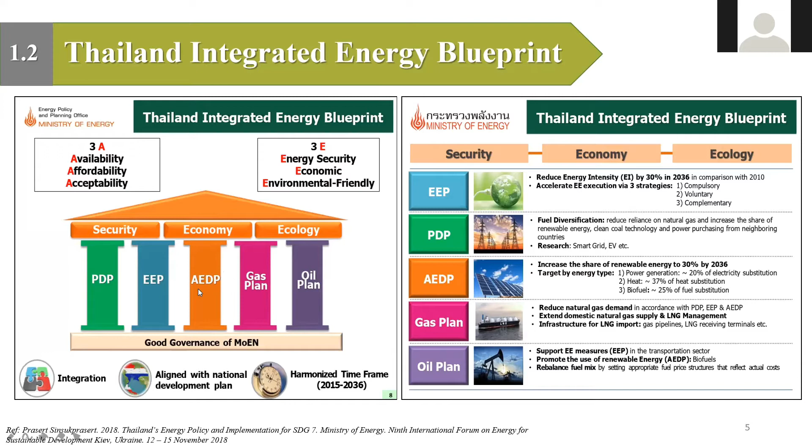Since 2015, Thailand has developed our own energy plan, which is called the Thailand Integrated Energy Blueprint. This blueprint describes 5 fields of energy. But I want us to focus on the AEDP, the Alternative Energy Development Plan. This plan, AEDP, describes the target of how much energy consumption and what alternative energy ratios we want to accomplish in year 2015, 2021, and 2036.

Maybe it's because we lack the amount of feedstock, biomass, biogas, or maybe because we lack power plants, the maximum capacity of power plants is still less than the target we aim. Or maybe it's not those 2 problems, but it's because of poor supply chain management, or because of bottlenecks occurring in the supply chain. So with this problem, I would like to study the bioenergy supply chain of Thailand and investigate the problem.

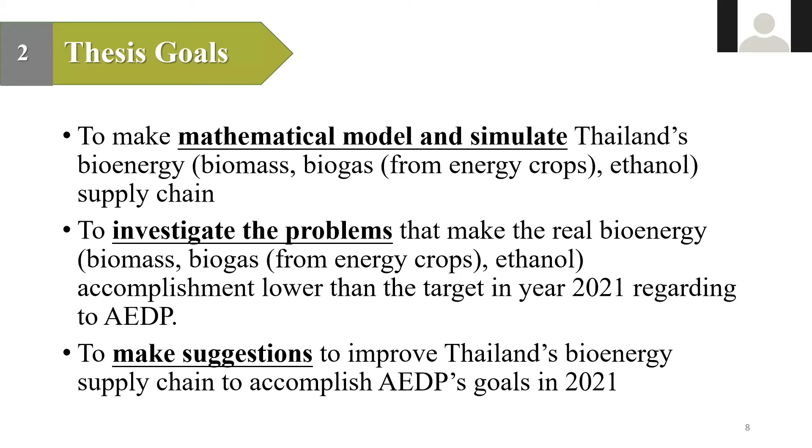So my thesis goals are: the first one is to make a mathematical model and simulate the Thailand bioenergy supply chain, focusing on biomass, biogas from energy crops, and ethanol. The second one is to investigate the problems that make the real bioenergy consumption ratios lower than the target in year 2021. And my third goal is to make suggestions to improve the Thailand bioenergy supply chain according to the plan in 2021. But before we start making a model and simulation, firstly we have to know about the supply chain profile.

Feedstock such as biomass can be used as a fuel to produce electricity directly, or it may be passed to some process to produce biogas first, and then this biogas is used to produce electricity. As far as I know, in Thailand we have 3 different technologies for biomass power plants: cogeneration, direct firing, and gasification. For biogas power plants, we have either steam turbine or gas turbine. These different technologies mean different energy coefficients, which we have to consider for the energy conversion. But I will talk about it later.

For feedstock such as crops, usually the crops pass to crop-based products manufacturing to produce some product first, and then from this product we get biomass and waste as byproducts, and we use this biomass and waste to produce electricity and ethanol afterward. The electricity is delivered to our distributors, which are PEA and MEA. These two are government companies.

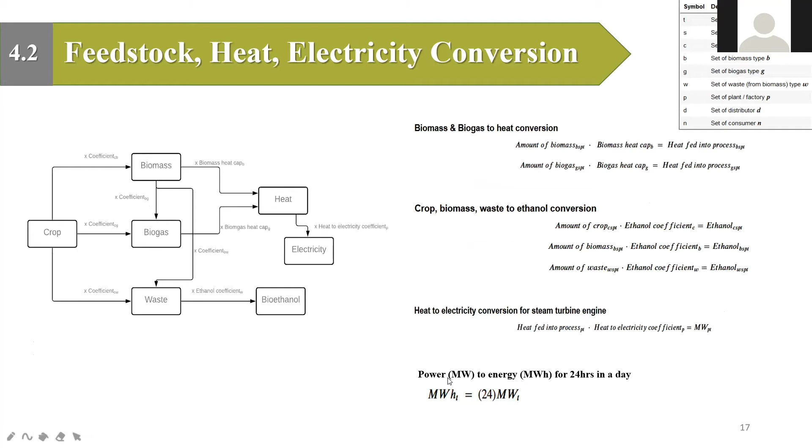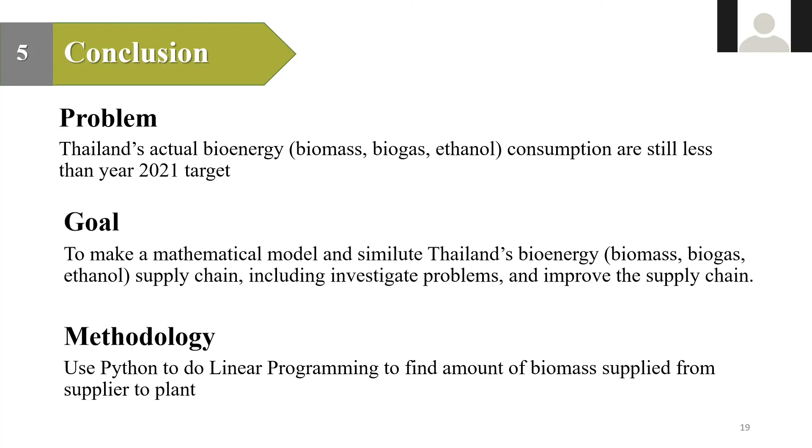My methodology is using Python to do linear programming to find the amount of biomass that deliver from supplier to plants at each time step. And this is all my presentation, and thank you for your attention.

Thank you, Paul. Thank you. Thank you. Thank you. Who would like to start with questions? Yeah, Henny, you can just start.

A couple of questions quickly. So first thing is, would you consider your master thesis to be part of some, let's say, white paper for your government? Could you sort of promote this work that you're doing to the authorities in your country, and assuming that you get interesting results and so on and so forth, turn this into something useful for the authorities and not being just something that gets you a grade and that's it?

Yes, thank you for this question. I actually want to present this to Thai government. I write an email quite a long time ago to Ministry of Energy, but they haven't replied to me yet. But I want to present it to Thailand as well.

Okay, because the point is maybe you could attend at some point, I don't know when, some conference related to this topic and meet with, let's say, high-level people there, or why not advertise this on, let's say, Twitter or LinkedIn, etc. Because if you manage to get something useful, then it is very, very good, because this is an important problem in your country. And if you could contribute at least part of the solution, that would be very nice for everybody.

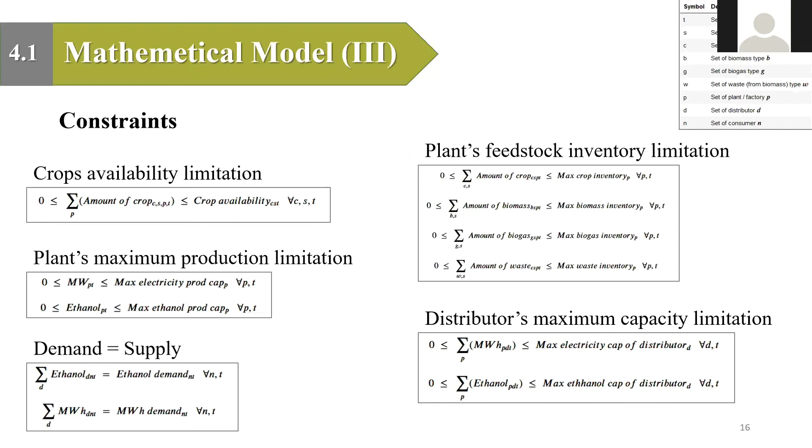Now, just a quick question again. If you go back to your slide with equations. Equation? Yes, you showed some equations, yes. So all these, basically, did you write them on your own, or did you adapt them from?

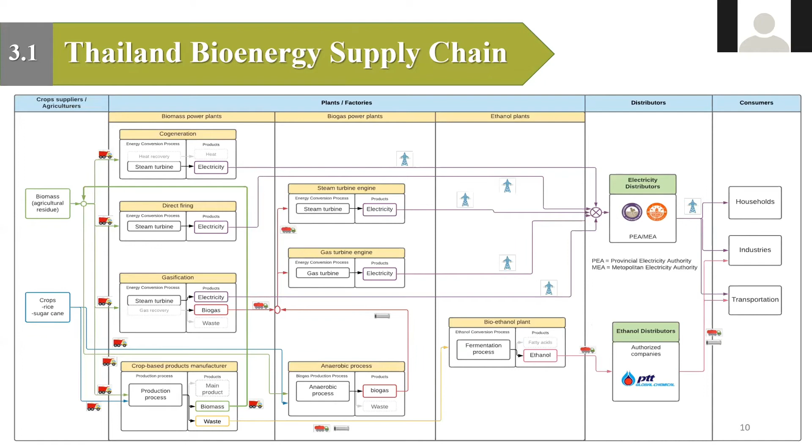First, I write on my own by understanding the supply chain. So I have to know what is input, what is output, and then adapting this supply chain, which I also make on my own for my understanding. To write this equation, I write my own.

Mm-hmm. Okay, so because for me the idea is that you really show that this is exactly your work and your ideas and so on and so forth. I didn't get that you did that on your own, and okay. So thank you. That's all for me. Thank you.

Peter, would you like to ask anything? Yeah, just a quick question. So it looks like you're doing some optimization. Yes. And this is like linear optimization, and this is a pretty standard model in this supply chain research. Yeah? Well, there is this field of study which is called supply chain. Like this linear programming is like the first thing to do.

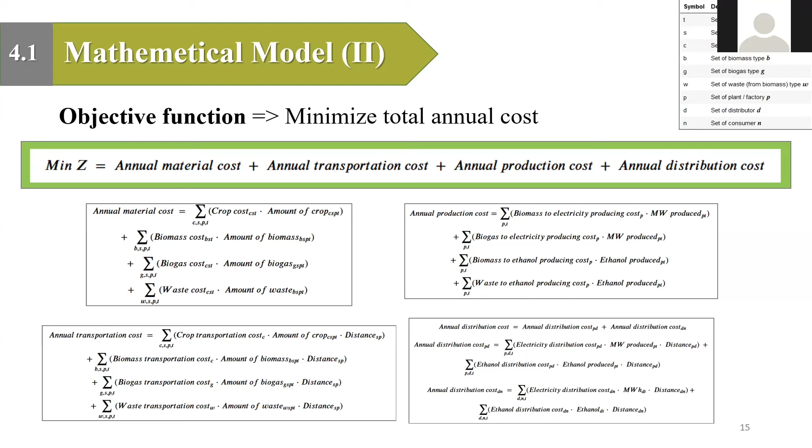So, but what are the methods that your government uses at present? Like typically, this kind of algorithms are implemented inside of those ministries or whatever plans at the planning stage. Okay, you mean what the Thailand government does to plan this goal, right? Yes, yes. So how is it realized now?

In the report, in the journal report of this plan, they haven't stated their methodology. It's like they collect the historical trend, and then they said what their goal is in the future. So I also don't know how they derive it, what their method is. So this is one of my points to develop my mathematical models in this thesis.

But do you have data to actually compare your results with what happens now? So for example, you have available data on the production of power, I guess. And then if you, for example, have the available data on the primary energy sources that you are using, then you can clearly show that the method that you develop, like a software that you develop, can allow to produce more, for example, out of the same set of primary energy resources.

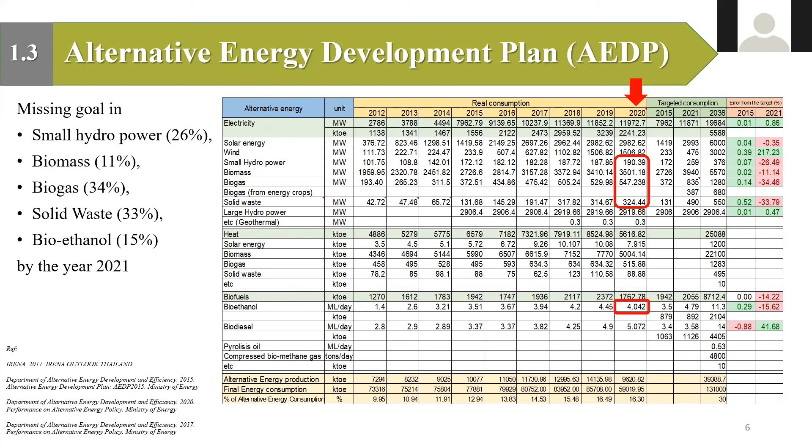So you need to compare it with something, that would be really good, because otherwise you say, okay, I wrote a method, but maybe they're already using something like that. See what I mean? You mean that I have to model something and compare? For example, if I use data in 2020, my result should be compared to the real result in 2020, right? Yes. So with the results that they already have, if you have the input data. So you definitely have the data on energy production, but you probably don't have the data on the amount of primary resources that were consumed. I have, I mean, resource, right?

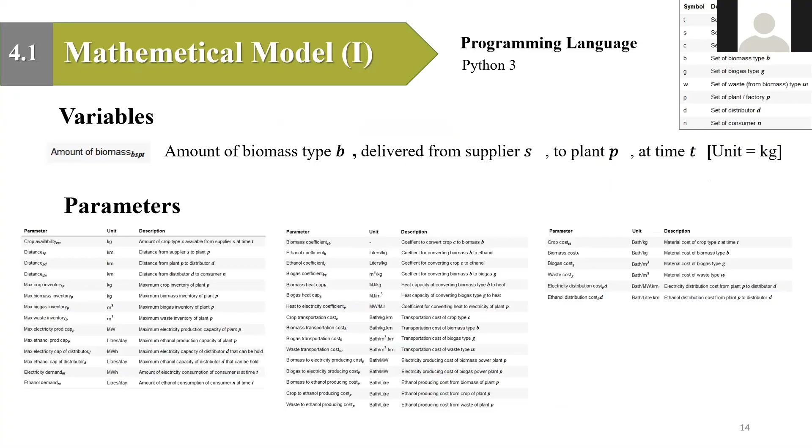Well, yeah, if you go to your formulation, so if you know the inputs to your system, the true inputs. Oh, okay. I will switch. I have some backup. Okay. Now what I know. Do you see my presentation, but not in full screen, right? Yeah, that's okay.

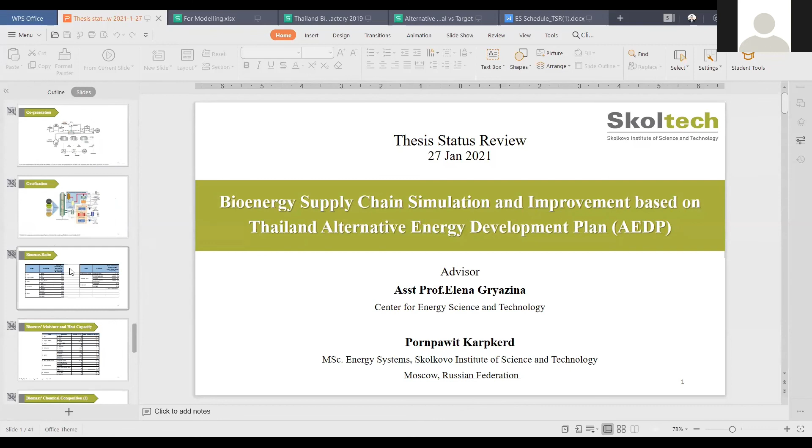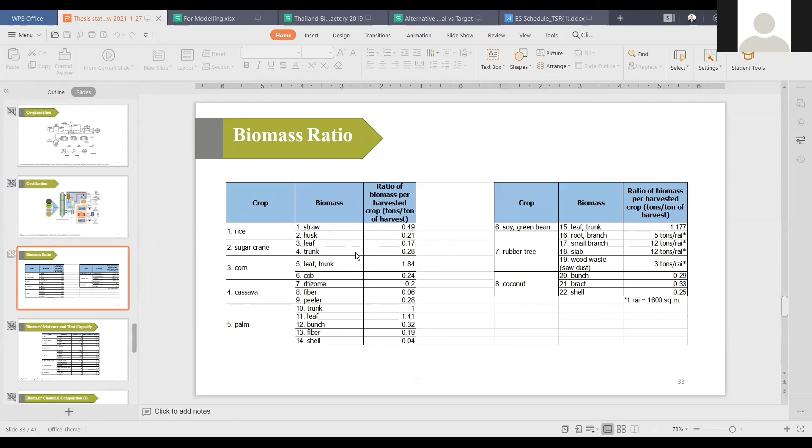In the slide I show the crops in a year, right? Annually. But now I know some data on how to convert these crops to biomass, which I got from the Ministry of Energy in Thailand, and also the heat capacity, moisture, and other data. Yes, I understand that. This is the data on how you convert things to electricity. But what I'm saying is that there is real live data on how much energy was produced, let's say a year ago.

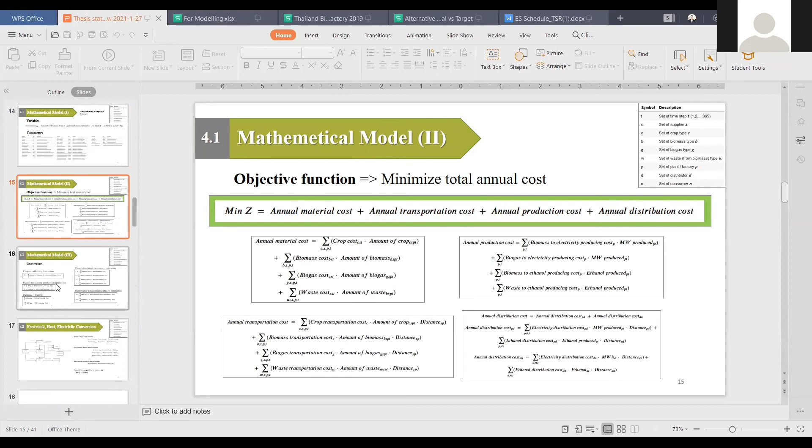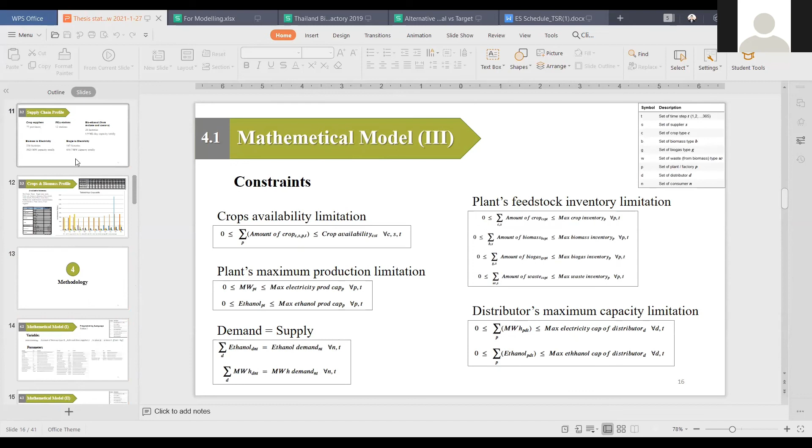I got the list of biomass power plants, also from the Ministry of Energy, but I haven't shown it in this. Okay. Yeah, let's not spend too much time yet. But I got data from the Ministry in Thailand. Okay. Yes, I got 270 factory data. Okay, thanks, Paul, for your presentation.